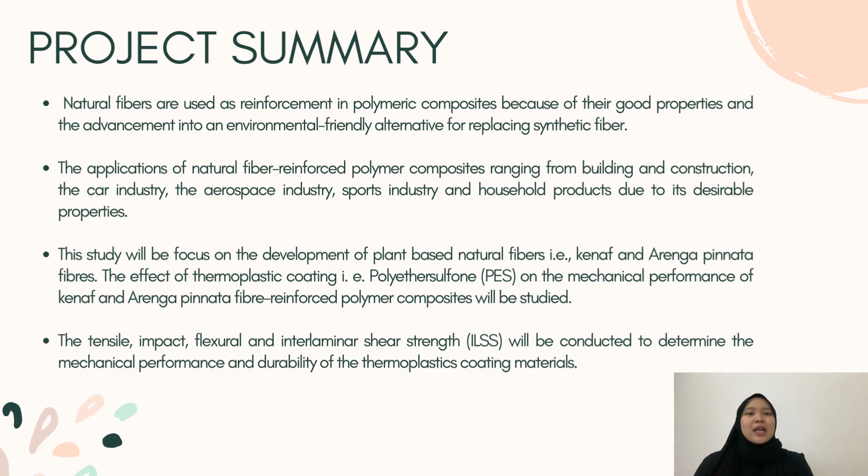Next, I will move on to the problem statement of my project. Natural fiber is known as an environmentally friendly alternative to conventional fiber as reinforcement for composite material. However, it has relatively lower strength compared to conventional fiber, and high moisture absorption is a major drawback of natural fiber reinforced polymer composite.

Therefore, this study is conducted to investigate the effect of thermoplastic coating based on PES on the mechanical properties of fiber reinforced polymer composite made from Kenaf and Arenga Pinnata. The durability of Kenaf fiber is very low compared to Arenga Pinnata fiber, especially when exposed to high moisture. Therefore, this fiber is coated with a PES nanosilica thin film to improve its properties.

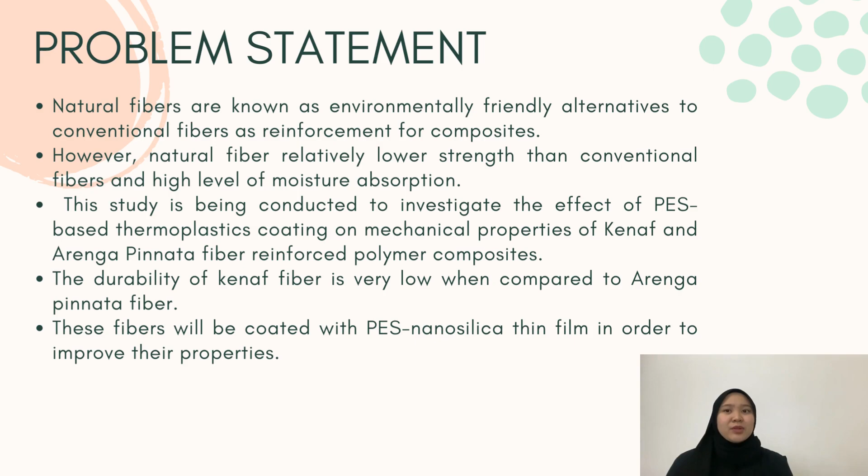Next, I will focus on the objectives of my final year project. The first objective is to evaluate the effect of polyethersulfone-based thermoplastic coating on mechanical properties such as flexural, tensile, impact, and interlaminar shear strength of Kenaf and Arenga fiber reinforced polymer composite. The next objective is to determine the effect of nanosilica filled polyethersulfone thermoplastic coating on mechanical properties of Kenaf and Arenga fiber reinforced polymer composite.

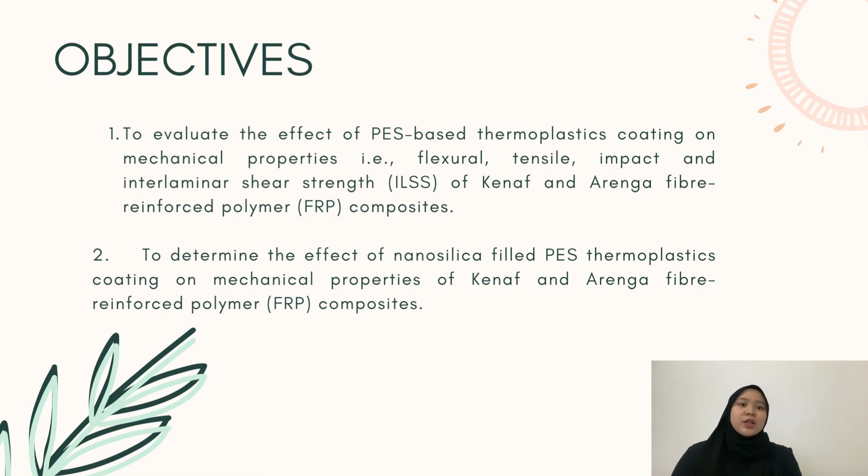Next, the literature review of this project. The first one is Kenaf fiber reinforced polymer composite. The Kenaf plant belongs to the hibiscus family. It is grown in India, Bangladesh, Malaysia, the United States, Indonesia, Vietnam, Thailand, South Africa, and other parts of Africa. Kenaf fiber as a reinforcing material has shown better specific properties than glass fiber due to its low density. Kenaf fiber and its composites have comparable specific stiffness to glass fiber, and the price is 2 to 3 times lower than glass fiber.

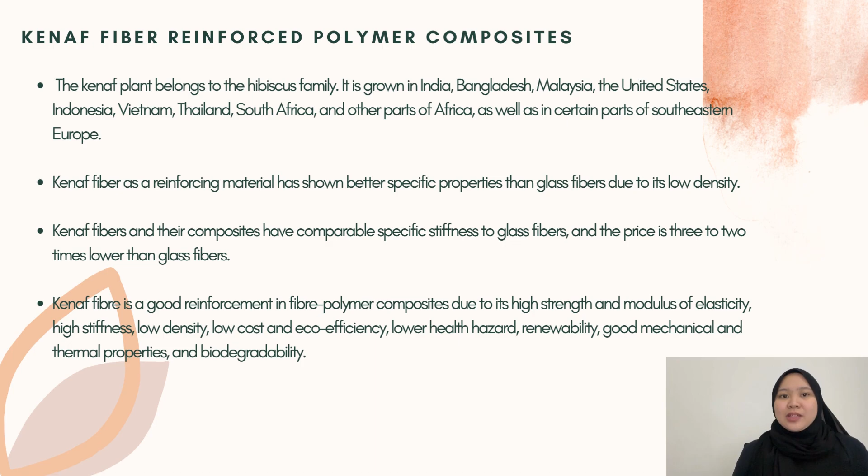Kenaf fiber is a good reinforcement in fiber polymer composite due to its high strength and modulus of elasticity, high stiffness, low density, low cost and eco-efficiency, lower health hazard, renewability, good mechanical and thermal properties, and biodegradability.

Next is Arenga Pinnata. Arenga Pinnata is a versatile palm species that can be used to produce a variety of food and beverages, wood products, biofiber, biopolymer, and biocomposite.

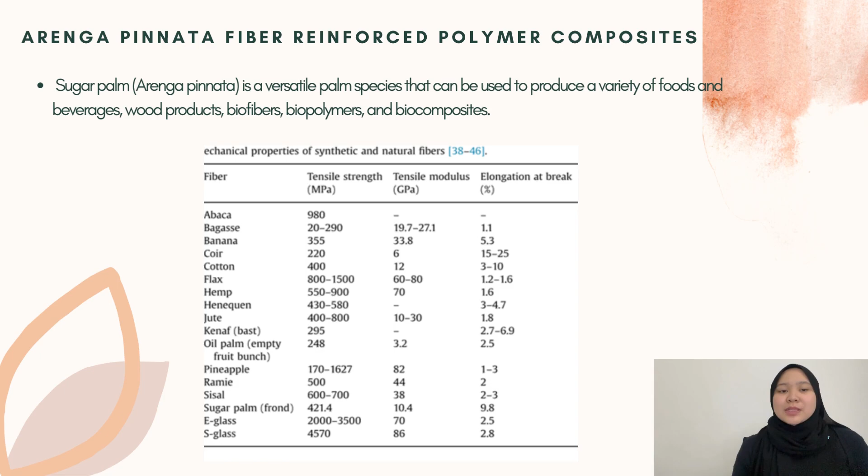As we can see in the table in the slide, it shows the mechanical properties of synthetic fiber and the most common natural fibers. In tensile modulus, Sugar Palm or Arenga Pinnata fiber exhibits better mechanical properties compared to some other natural fibers.

Next is polyethersulfone-based thermoplastic coating and nanosilica. PES is the second most widely used membrane material in MBR. It has a higher melting point and thermal stability than other polymer membranes, having only 1% mass loss in air at 400 degrees Celsius. PES is more hydrophilic compared to PVDF due to its molecular structure that facilitates hydrogen bonding with water molecules. Therefore, a higher permeate volume can be achieved with the PES membrane.

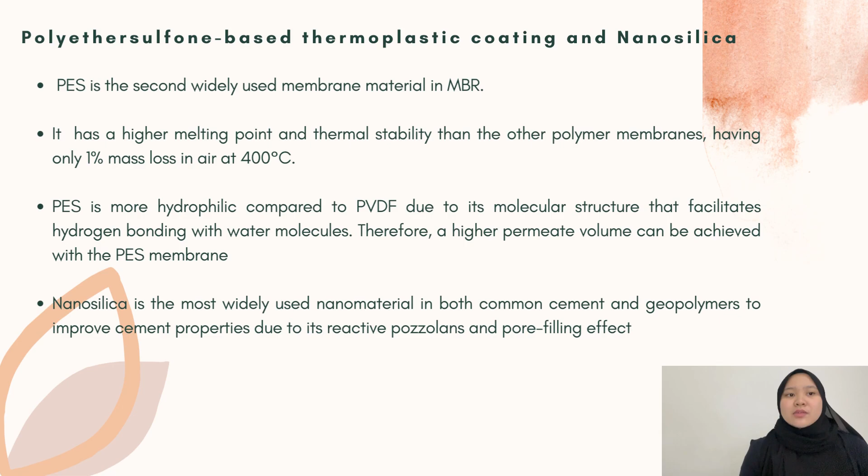Nanosilica is the most widely used nanomaterial in both common cement and geopolymer to improve cement properties due to its reactive pozzolanic and pore filling effect.

Next, I will continue with the scope of my final year project. This research focuses on the effect of polyethersulfone-based thermoplastic nanosilica coating on the mechanical properties of Kenaf and Arenga fiber reinforced polymer composite.

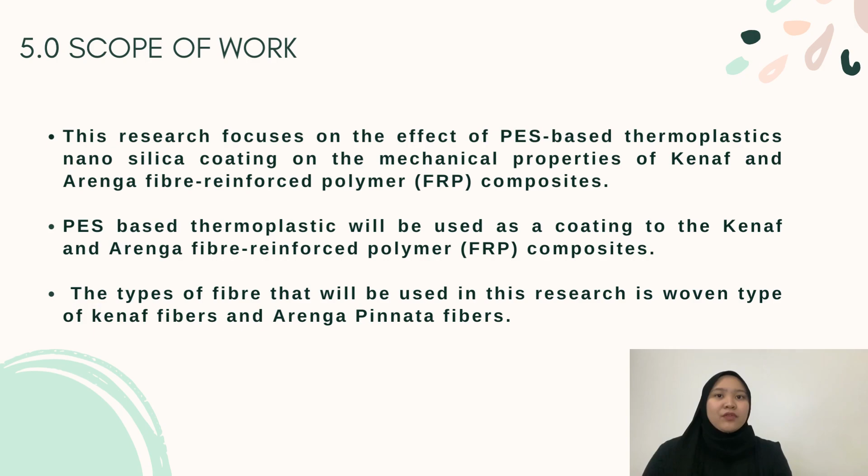PES-based thermoplastic will be used as a coating on the Kenaf and Arenga fiber reinforced polymer composite. The type of fiber used in this research is woven Kenaf fiber and Arenga Pinnata fiber. Four different types of mechanical tests, namely flexural, tensile, impact, and interlaminar shear strength, will be conducted to analyze the performance of Kenaf fiber and Arenga Pinnata with polyethersulfone-based thermoplastic nanosilica coating.

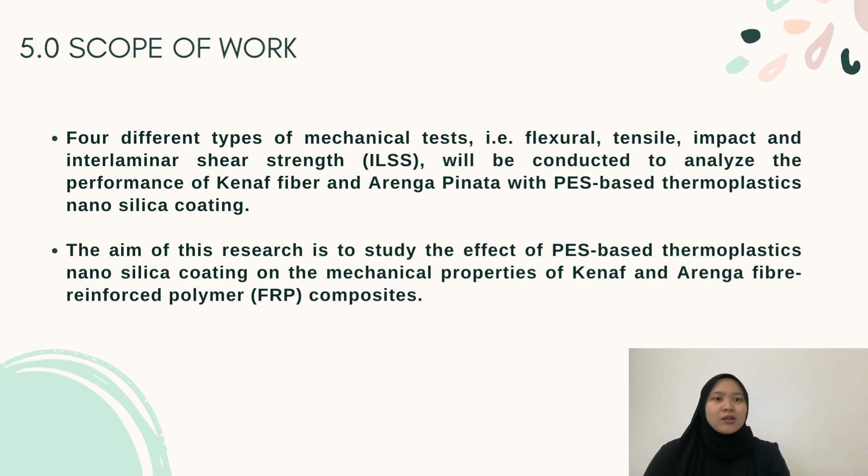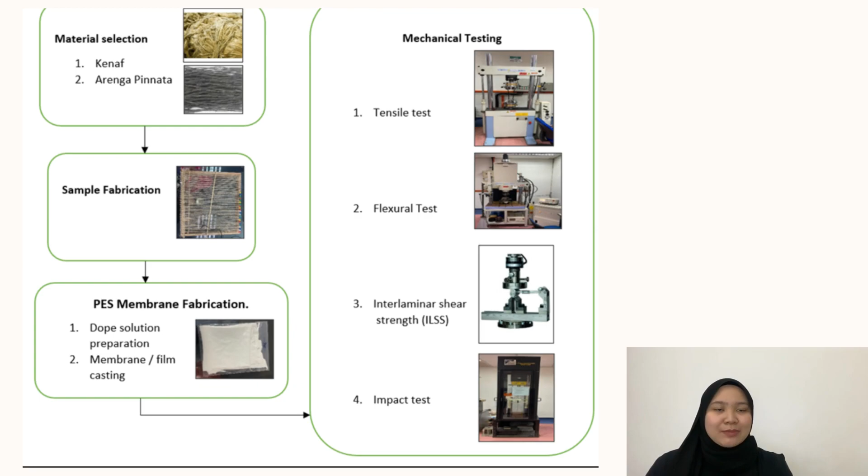Next, let's move on and look at the methodology of this project. This part will cover the material selection, sample fabrication, polyethersulfone membrane fabrication, and mechanical tests.

The very first step is material selection. For this project, the fibers used in this study are Kenaf and Arenga fiber reinforced polymer composite. Polyethersulfone-based thermoplastic will be used as a coating for the Kenaf and Arenga fiber reinforced polymer composite.

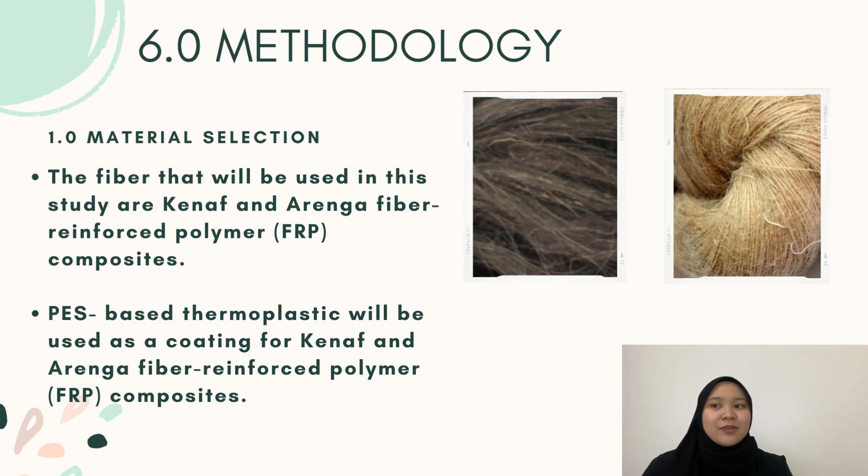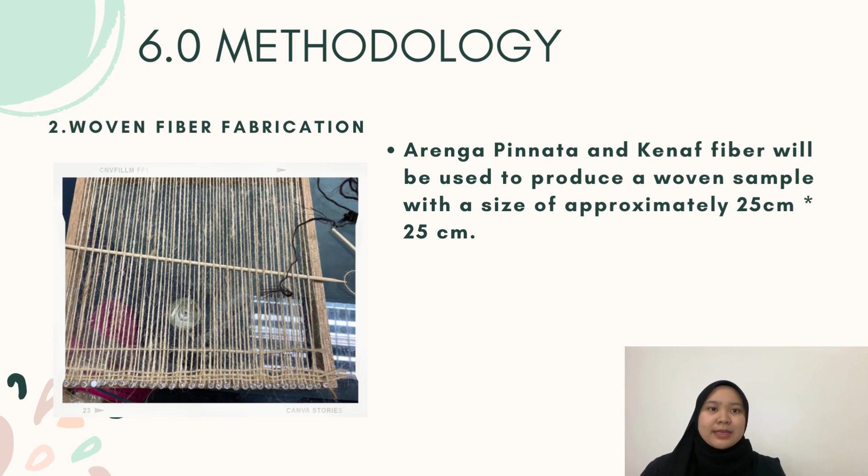Next is the woven fiber fabrication process. Arenga Pinnata and Kenaf fiber will be used to produce a woven sample with a size of approximately 25 cm x 25 cm. The fiber will be woven manually as shown in the picture.

The preparation of the membrane began with the preparation of the dope solution. The composite membrane PES were prepared according to the formulation of the ratio DMAc to PES of 84:16 weight percentage. The casting solution was first prepared by adding PES in the DMAc. The solution must then be stirred at 60 degrees Celsius for 24 hours until it dissolves.

Prior to casting, the resulting solution was degassed to remove bubbles trapped in the casting solution. A phase inversion procedure was used in which the solution was poured onto a clean and dry glass plate, then spread using a glass rod with a fixed gap of 0.1 mm between the plate and the rod.

The glass plate with the membrane film was immediately immersed in a solvent-free coagulation bath containing DI water to allow phase inversion to occur. The formed membrane was then transferred to a fresh DI water bath and left for 24 hours to allow complete phase inversion. The membrane was then washed with DI water and dried at room temperature.

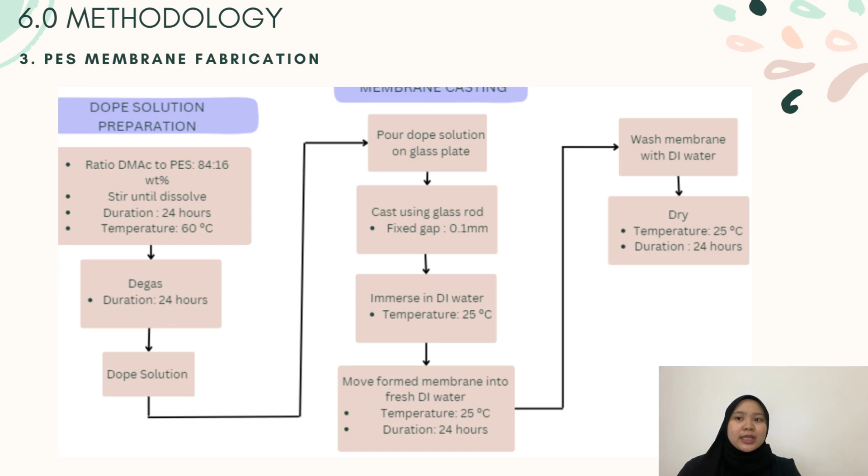The last one is the mechanical testing. The first one is tensile test. The tensile tests will be conducted according to ASTM D5766. The Kenaf and Arenga Pinnata composite specimen with size of 250 x 25 x 4 mm will be tested using an Instron 3382 universal testing machine with a crosshead speed of 2 mm per minute.

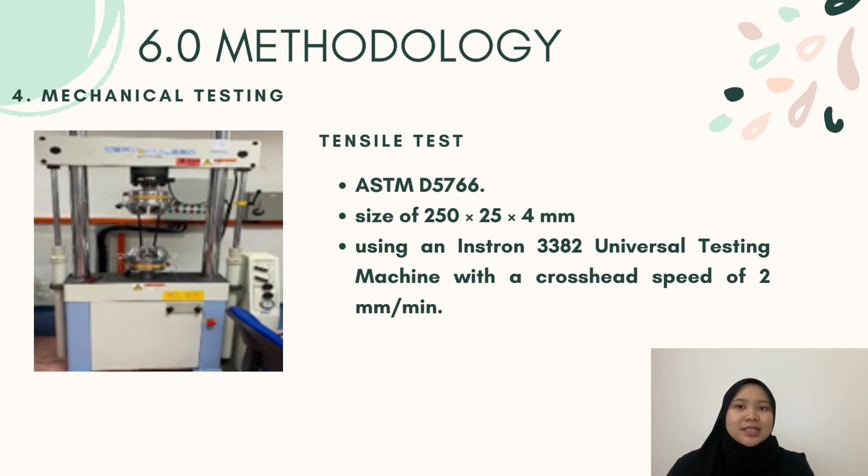Second one is flexural test. The composite specimen with size of 80 x 13 x 4 mm will be tested using an Instron 3382 universal testing machine with a crosshead speed of 2 mm per minute. The span length to sample thickness ratio will be maintained at 16:1. Approximately 5 specimens for each composite system will be tested and the average flexural strength and modulus will be calculated from the obtained values.

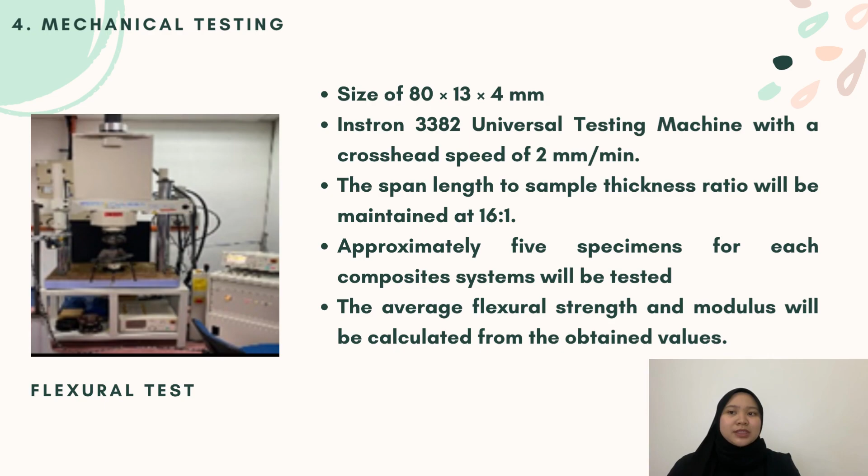Next is the interlaminar shear strength. The test will be conducted using an Instron 3382 universal testing machine according to ASTM D2344. All the composite specimens will be cut into 36 x 12 x 4 mm strips. This test will be conducted at a crosshead speed of 2 mm per minute, and approximately 5 specimens for each composite laminate will be tested to obtain an average value of ILSS.

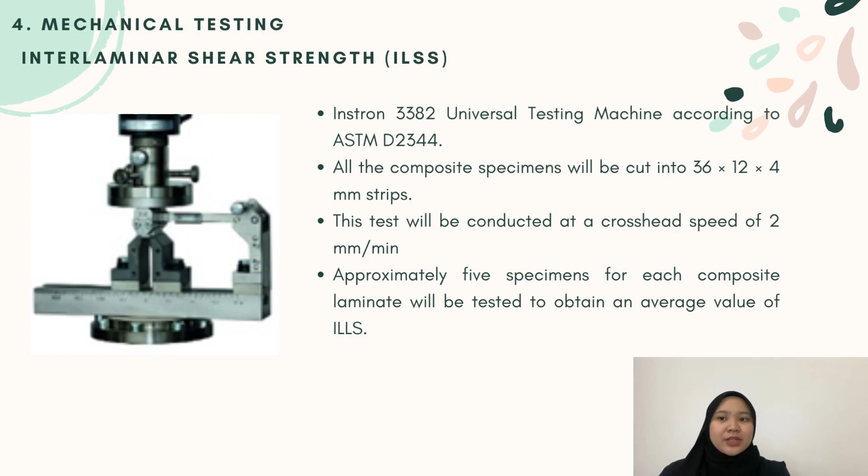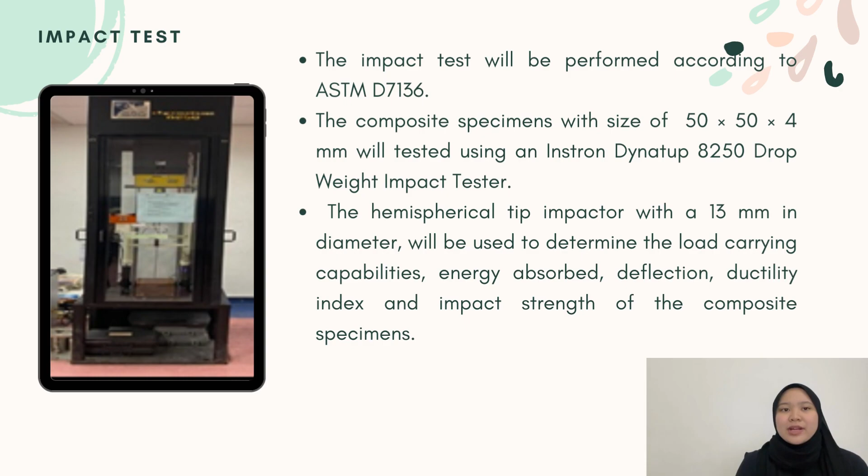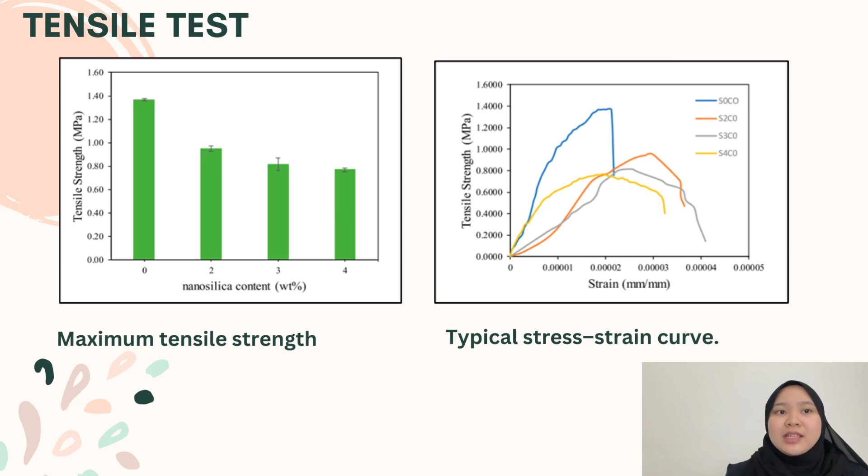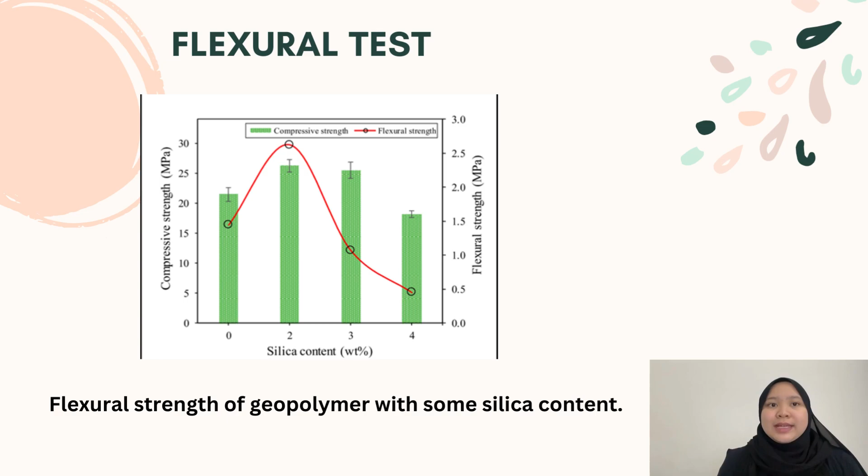This is for the flexural test. The result indicates that the flexural strength follows the same trend as the compressive trend, and it was confirmed by other studies that the addition of nanoparticles increased the strength of geopolymer cement paste. The addition of nanosilica particles began to affect the flexural strength of the geopolymer.

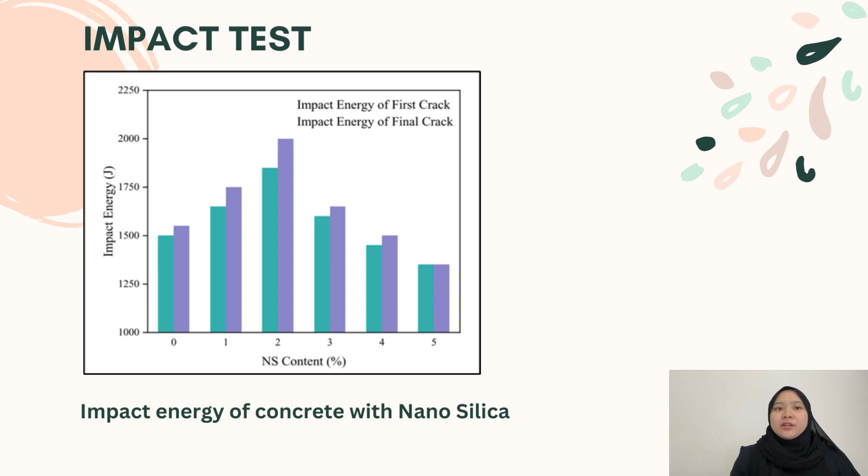The last one is for the impact test. The effect of nanosilica content on the impact energy of the concrete is shown in the figure in the slide. It can be seen that as the content of nanosilica changes, the impact energy differs. This indicates that nanosilica can improve the initial crack impact resistance of the concrete, but after the initial crack, the concrete continues to store energy.

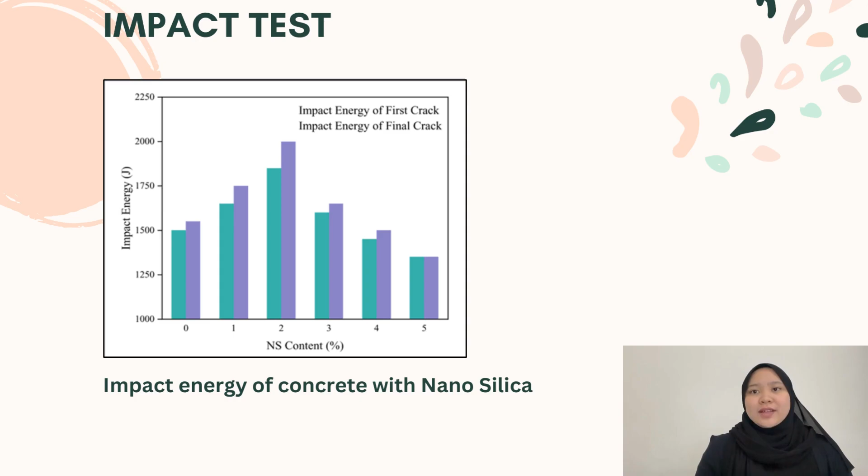From all the graphs that we gained from the journal before, it can be said that the effect of thermoplastic and nanosilica coating on the mechanical properties of Kenaf and Arenga Pinnata fiber reinforced polymer composite can be predicted. That's all from me. Thank you.